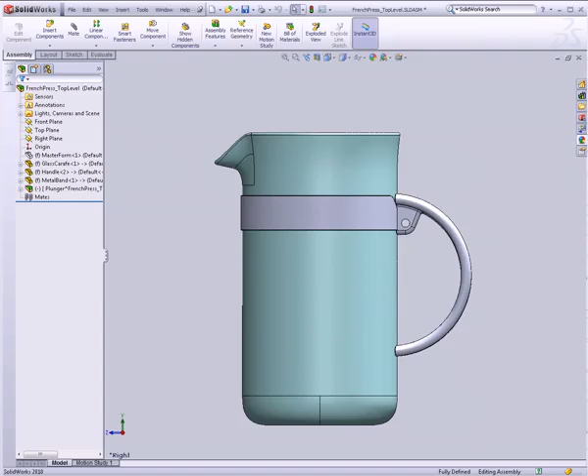Let's see if we can get this plunger in here pretty quickly. I'm going to hide the glass carafe for the moment and open up our little plunger subassembly. And let's look at the plunger bottom plate.

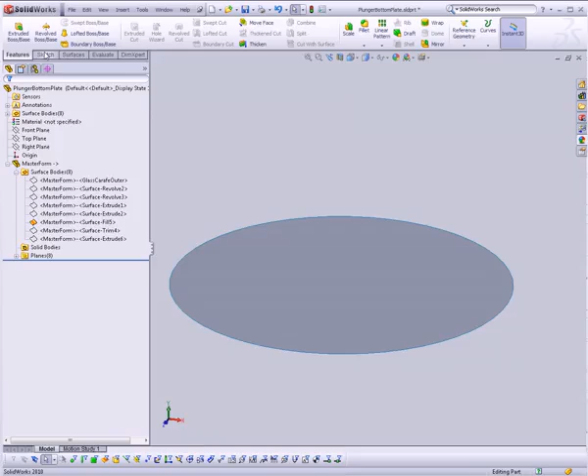That's going to be the simplest of all of these. I'll make sure in the surface bodies I want to show this one, this little circle down here. All I'm going to do is go to Features, Thicken, click on the surface, and thicken it by maybe 3/4 of a millimeter, so it's pretty thin. Now I'm going to go to the top plane.

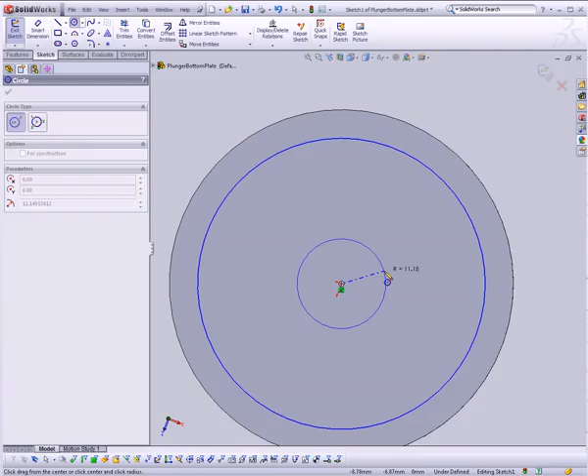Actually, let's go ahead and sketch on the plunger bottom plane. There we go, I'm going to draw a circle. I'm eyeballing this, by the way, because I know what it looks like, and what it looks like is good enough for this part. This part doesn't have to be mechanically accurate or anything like that.

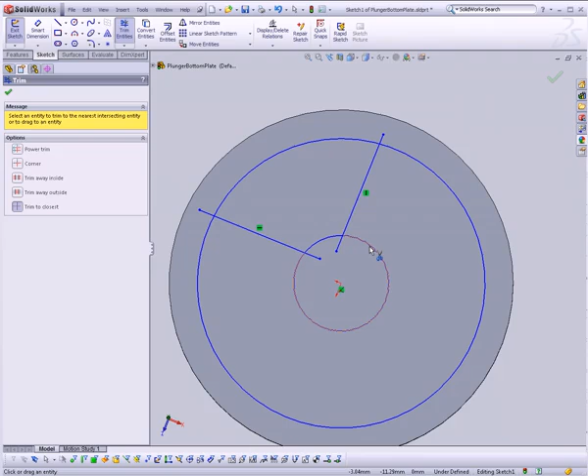So I'm going to make a vertical line off to the side, make a horizontal line as well. Then I can use this tool right here, Trim Entities. If I click on that, I can just click on parts of the sketch to delete them. So we have a little hole that we can use to cut out in our geometry.

I'm going to go ahead and also add a 1/4 inch or 6-ish millimeter round on these corners. It looks like that's probably too big. Maybe we'll do 4 millimeters. That looks a little better.

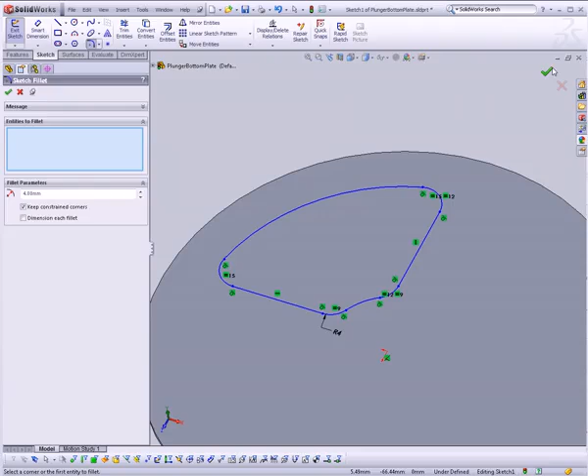And click OK. So now I have my sketch, and I can go ahead and go to Features, Extruded Cut, use that as my cut. I'll use this button over here next to Blind to flip the direction, and I'll just say Through All, so that it'll just go through all of our geometry, but no further.

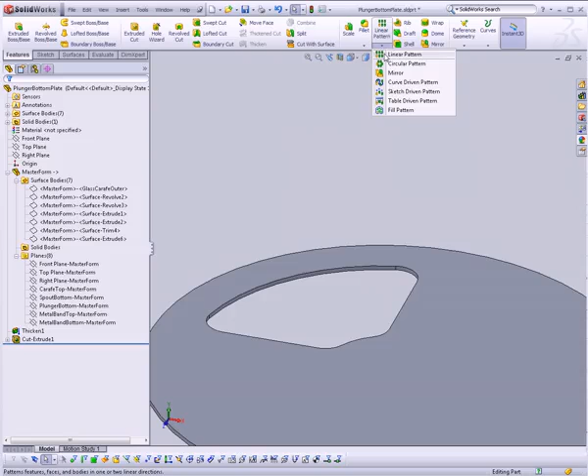Finally, let's go up here to where it says Linear Pattern. I can drop down, and there's actually a circular pattern as well. For the center of our circular pattern, I'm just going to choose this outer surface, because since it's a perfect cylinder, SolidWorks knows to use the axis, the center axis of that cylinder, as the center of our rotation. I'm going to choose under Features to pattern this time, instead of bodies, I am going to pattern features, and I'm just going to choose this Cut Extrude.

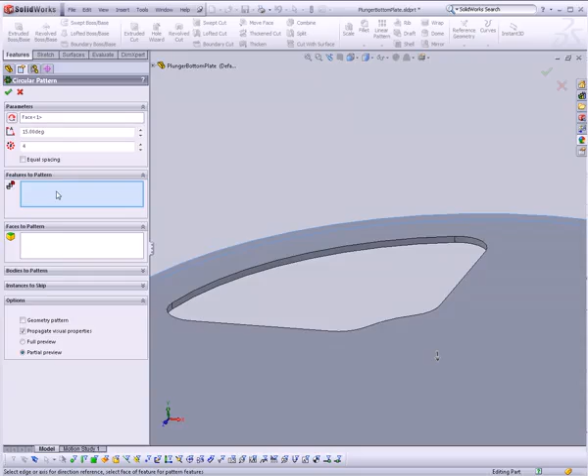As you can see, it's duplicated it 4 times, which is the correct number. We just have to set up the angle to 90 degrees, so we'll get 4 of them all the way around. And there we go.

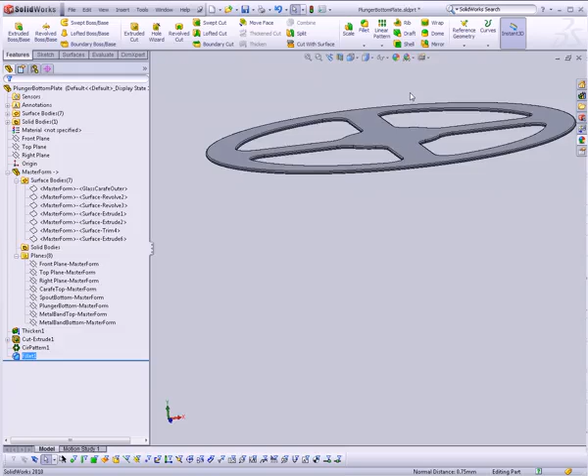That should take care of our bottom plate. I will go ahead and also add 1/4 millimeter radii on both faces. Again, because once we go to render, that will actually look a lot nicer. Close this up, and we have the bottom plate of our plunger.

Now I just got to move on to the next one. So let's go ahead and do the plunger screen next.

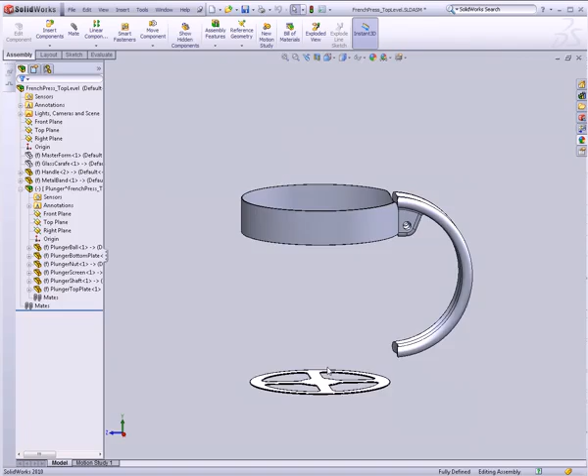This one, actually, why don't we edit this one in context so we can see what we're doing a little better. So instead of opening the plunger screen, I'm just going to click, instead of open, right to the right of it, there's this one with the little blue rectangle on it. It says Edit Part. Click OK. And that will edit our part in context.

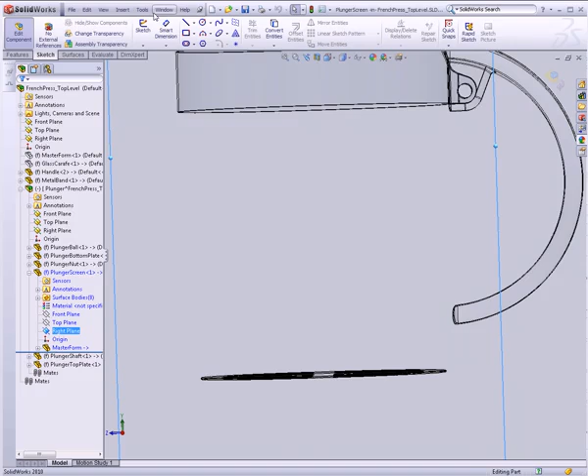So we can actually just work with it right here. And so on the right plane for that part, I can sketch. Now when you're working in context, you have to be very careful. You do not want to do things like constrain a sketch to an external part. Do not do it. It will be tempting, but do not constrain anything to anything else within the context of an assembly.

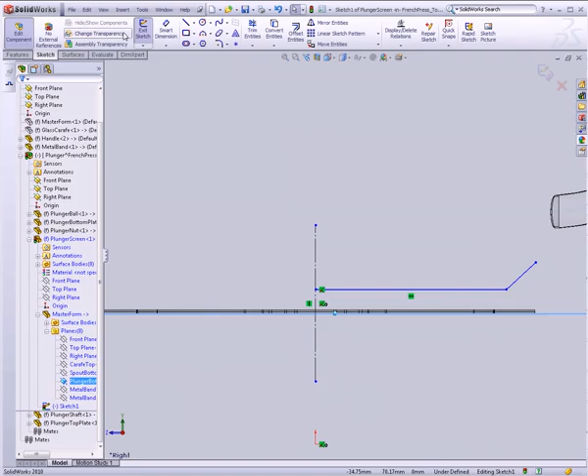You will be sorry that you did it. You'd be much better off constraining only within your current part. So we'll grab our plunger bottom plane and make this, what do we say, maybe 0.75 millimeters. In fact, just to make it not touching, I'm going to make it 0.8 millimeters.

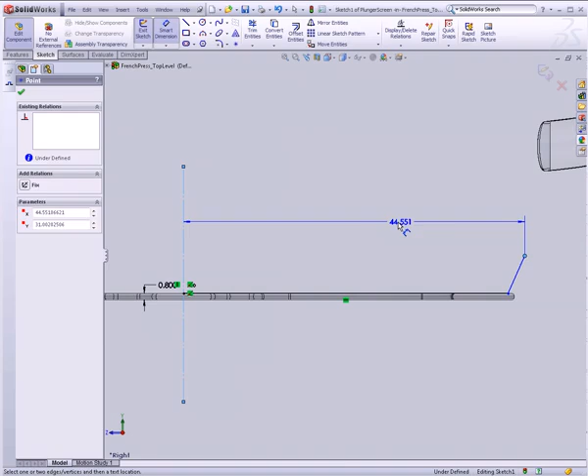And this outside edge is kind of unimportant where that is. Just make sure that this is small enough. Let's say 1 point, I don't know, 7? Oh, 1.7 inches.

And let's go ahead and show our glass carafe actually now, so we can see where its edges are. And I can click on the glass carafe and tell it to change transparency, so it'll be kind of ghosted. Makes it a little easier to see what we're doing.

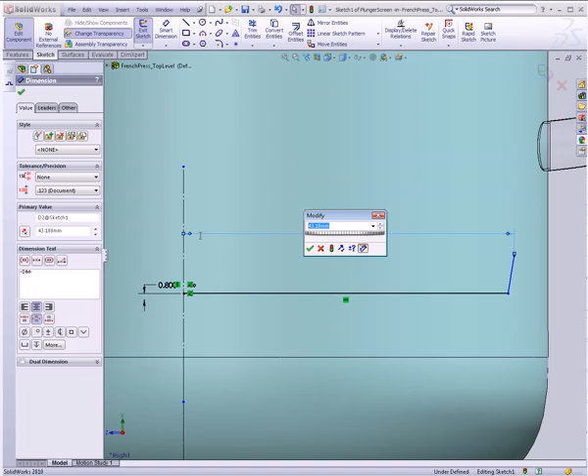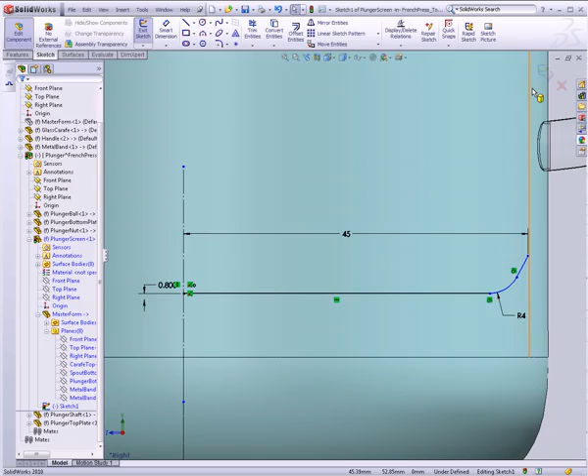So I can bring that up to maybe 45 millimeters, something like that. Perfect. And we'll just add a fillet to this corner. Hide the glass carafe again.

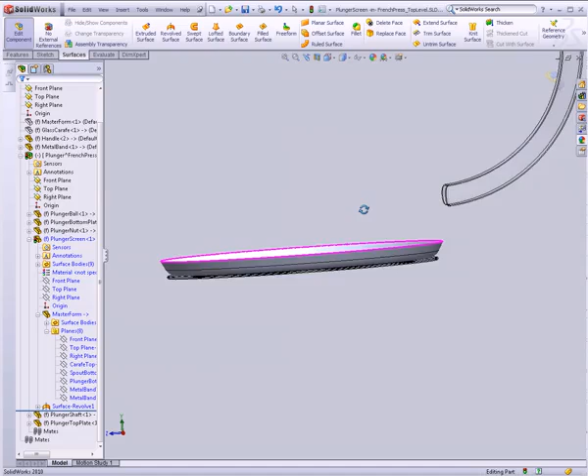And now we can just use a revolved surface to create what's going to be our screen. And we'll just go ahead and go 360 with it. Now the screen, I actually don't want it to be dimensional. I'm just going to leave it as a surface body, because in Modo that'll be easier to work with when we're rendering.

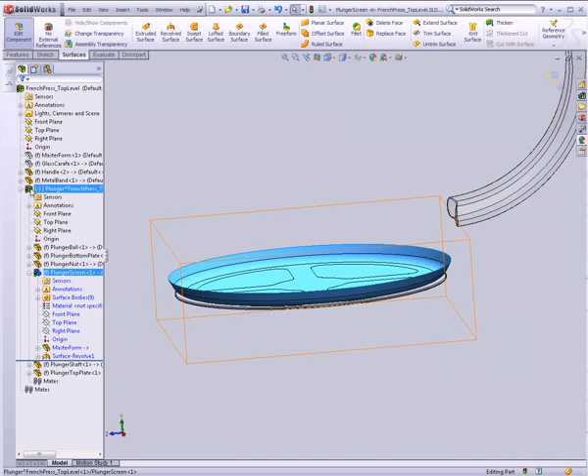And click, so we're in the context of this assembly right now, and the way you can tell that is: A, the history bar is right here in the middle of our assembly, which is kind of weird. B, you can see the little stoplight on this plunger screen, telling us that we are currently editing at the top level, on the plunger, and on this plunger screen. So if I click on this button here, that will bring us back into our main assembly.

And I can click on this guy. There we go. So let's just go ahead and save all.

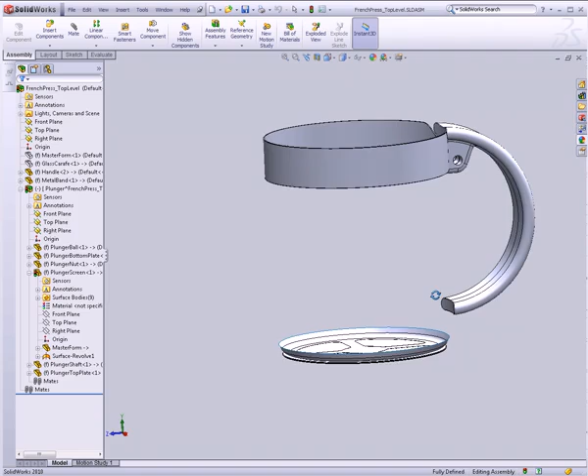We have one more part that we need to add at the bottom of this plunger, which is the plunger top plate. And actually we're going to add that in a separate video. So let's go ahead and do that.